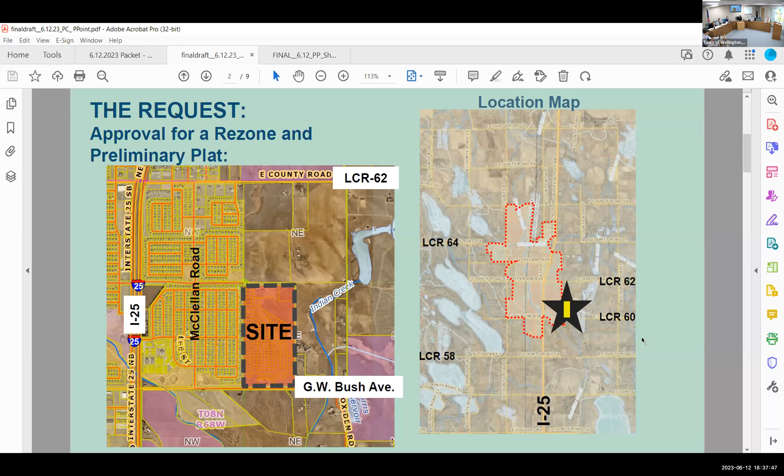So here's your location map and the site exhibit to illustrate that location. Again, if there was an error in the exact distance, it could have been copy and paste, but this is the site. It's an undeveloped platted subdivision just east of the Meadows on County Road 60, which is GW Bush Avenue. The existing zoning of the property is R2 residential low density.

The existing zoning was assigned at the time the property was annexed into the town, and that zoning was requested before the town's land use codes had changed, when the R2 was the residential medium density designation. As part of our comprehensive plan update and land use code update process, some titles changed, and some of the lot dimensions changed across the board to recalibrate all of our residential zone categories to what they are today.

So after this particular subdivision was annexed and zoned and platted, the final plat was approved in 2018. Subsequent to that, the property hasn't developed and the town's codes have changed. The applicant is now taking a look at the bigger picture for this particular subdivision in an effort to make sure that it can be financially viable in today's marketplace with those changing circumstances, and they're requesting to rezone and replat.

As I mentioned, and there's more detail in the staff report, the rezone request is really geared at the applicant asking, can we reduce the lot sizes and make the lots narrower to fit a different housing model type than what was originally contemplated.

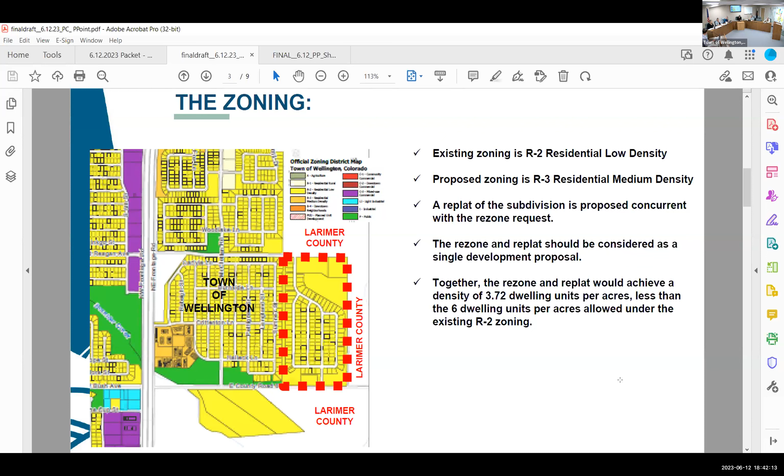But honoring the original layout and intent, from a zoning perspective, those additional lots that could be created through this development proposal are still overall under the density of the existing zoning, at 3.72 dwelling units per acre. So it's well within the R2 zoning characteristics. The R2 zoning just doesn't allow the lot size that's being requested for this particular development proposal.

And there's the text version of what I just explained. So I should have jumped this slide. Perhaps...

The important component of the changes for the lot size, as I mentioned, the irrigation water scenario, the overall changes to the site that are proposed would allow the lots to be a little bit narrower to fit what the developer thinks would meet market conditions. It also proposes reducing the depth of those lots. Some of the lots on average are currently platted to about 140 feet in depth, and that's a pretty deep lot for that narrower proposed lot configuration.

At the end of the day, what the proposal contemplates is shortening the depth of those lots, and that space would be converted to HOA common area and open space, proposed for native vegetation that would have a much lower irrigation requirement, probably just for establishment of the vegetation. After established, it would require very little supplemental water for irrigation purposes.

As town staff was evaluating the proposal, we look at a number of things, including your planning commission's findings for approval. One of those findings is the comprehensive plan. We highlight in the slides here, and the staff report goes into a little bit more depth on each of the findings.

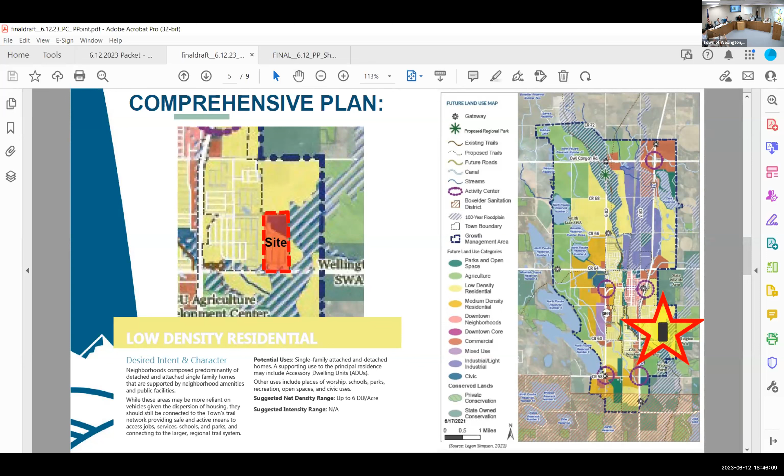And there's other factors identified in there as well, including the town's water efficiency plan, our infrastructure master plans, and our street classification and master plan. All of those documents do support, and the town can support, the infrastructure necessary for the proposed rezone and replat as presented.

So the next couple of slides, I don't want to necessarily read through these verbatim. They're on the slides, hopefully everyone can see them. There's a second monitor over here on the wall for those in the audience. But the intent here is to highlight the factors that the Planning Commission considers on a rezone, and these are further detailed in the staff report.

I can certainly come back to this if it's helpful, but I also wanted to point out the next slide, which I just switched to. It's hard to see a big difference because it's text heavy, but the second slide here is the findings for approval for a preliminary plat. So I can go back to these as necessary for presentation or review purposes.

Overall, I'll conclude with staff's assessment here, just high level, and then I'm certainly happy to go back to the staff report for more details. But overall, staff does support the request to rezone and replat this particular subdivision. That analysis is based on some of the things I just described, but primarily that this is a different way of looking at the same development proposal that the town approved in 2018.

The town has more detailed comprehensive plan land use regulations, and more information regarding our water infrastructure, our water and wastewater treatment plants, and rethinking what was originally proposed with smaller lots is more supportive of the town's infrastructure goals, primarily the irrigation component of that. The overall request is to change the number of lots from 153 that are platted today to 211, and that change reduces the average lot size, which impacts the irrigation component.

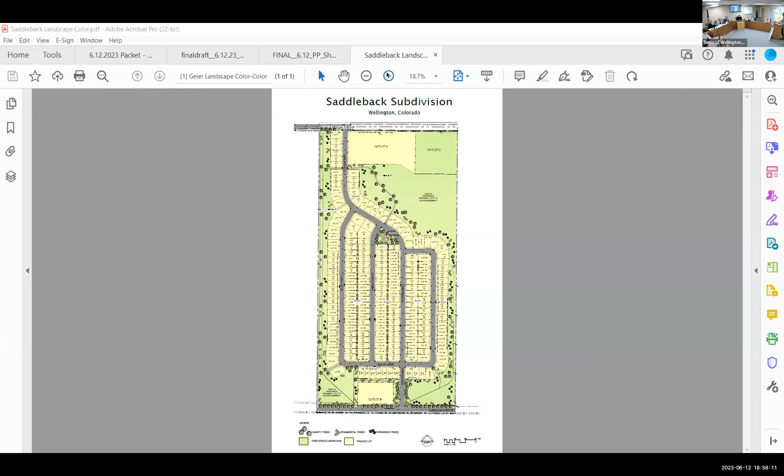Some of the lots on the existing plan are about 19 to 20,000 square feet, with an average of about 11,000. The average on the new plan is about 6,500 square feet, so just under the existing R2 zoning. With that, if anyone's got any questions for me, or we can open it up to the public.

Anything for Tom? One quick question—so when you were addressing this issue, and I do appreciate the mindfulness to water, cost, all of that—did you look at what a replat would look like at 6,600 or maybe a little more than that? I mean, 6,600 isn't super big.

And I'll be honest, my perspective is that I have a house on 6,900 square feet. So that's kind of my perspective.

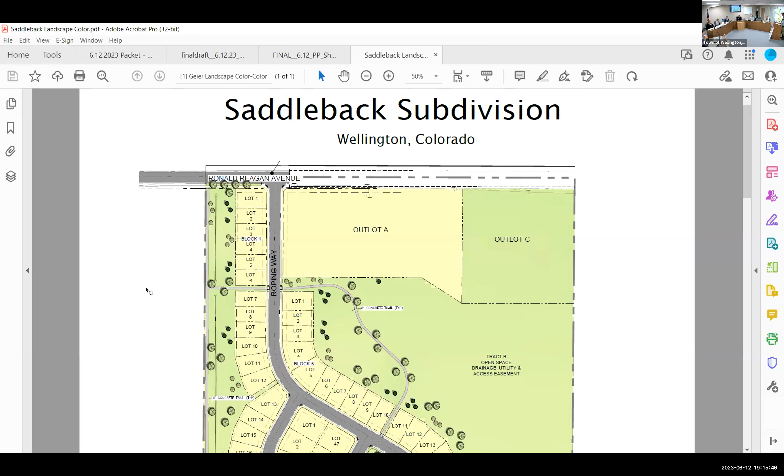I have one more question for you. Just doing a quick comparison in the center section where the park was moved into the subdivision, which I like, by the way, previously there were 31 lots. There are now 40. That's a 30% increase in the number of lots just in that center section. When I look to the west, these outer lots, originally there were 25. There's now 39, which is an increase of 56% in the number of lots.

So my question is, my comment is I like the variety of lot sizes, okay? But to go from 153 to 211 and to cite a water concern, I don't really get it. That doesn't compute for me. So I guess I'm wondering, was there any consideration for more open space? For example, another park on the south end of this property? Because right now the park for the subdivision is on the north end, but if I live on lot 44, I get a little trek to get to the park. So was there any consideration for doing something like that?

So in reality, no, we didn't consider that. The main goal here was, well, there were two main goals. One was to make the homes more attainable and affordable for the people buying them. The other was to reduce the amount of treated water being used for irrigation. So the perimeter lots were actually the largest lots on the original plan, and that's why you see the larger percentage of reduction. The other thing I want to bring up is the town code requires one pocket park per 200 homes, so we put in one pocket park for the neighborhood. It's not a neighborhood park, it's considered a pocket park. And then we have a considerable amount of open space in the project.

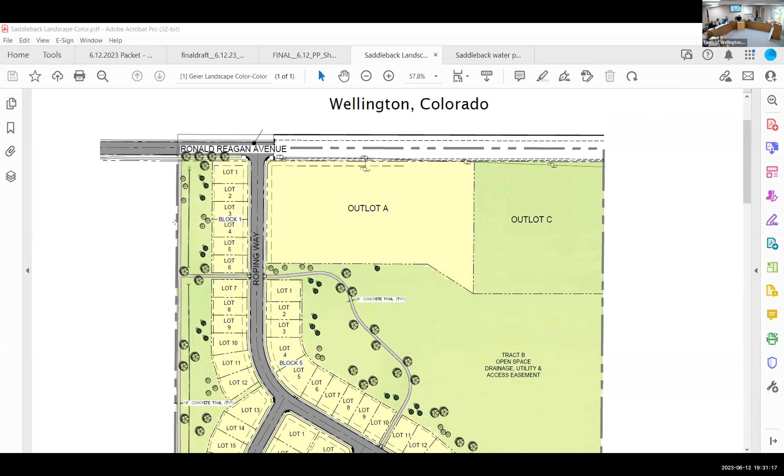So to speak to the drainage, town staff is aware of an existing condition here at the north end of the property where Park Meadows and the Meadows come together at Ronald Reagan. Part of the original development agreement and the existing development agreement for this property contemplates that existing condition. The developer is required to not only handle any additional runoff from the site development, but they're also required by that agreement to improve this existing condition to accommodate this flow better.

Staff had identified a concern that Ronald Reagan Avenue needed to be designed in such a way that it would allow passage of those stormwater flows past the roadway and not create a dam. We don't want to impact drainage north of Ronald Reagan. We've also identified some concerns with the way drainage was flowing along the Meadows.

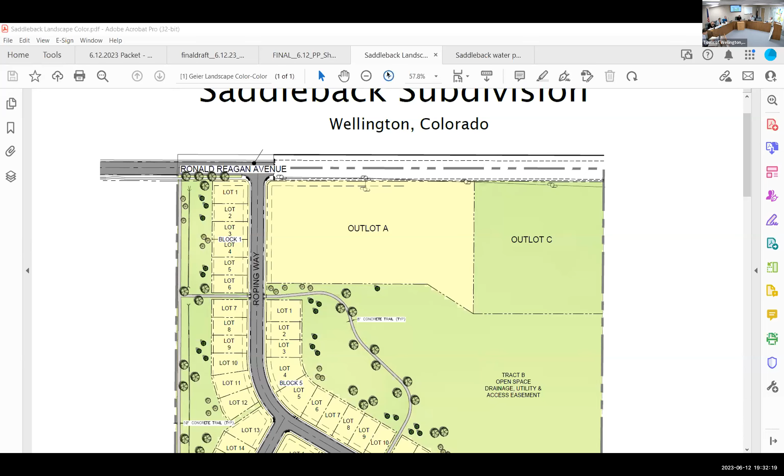So what you're seeing here, this is open space. Maybe if I even zoom in a little bit further. This area includes a sidewalk and trail connection for recreational and open space purposes. That's this gray shading you see. This whole tract that constitutes the open space is really a big swale.

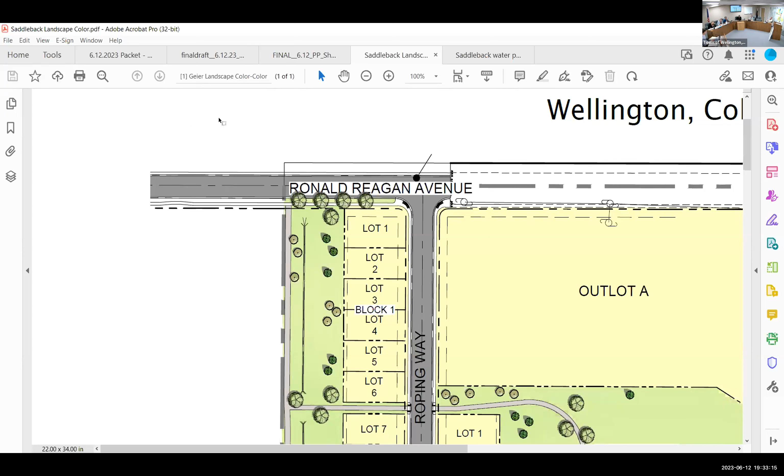It's a U-shaped channel to accommodate both the on-site drainage, so that when this property gets developed someday, the drainage for the site is required to handle all of the stormwater created from this site. It's also required to handle all the off-site flows that pass through the site. So the historic flows have to be handled here. This isn't existing today, but it's designed to be a pretty significant U-shaped channel to handle the expected stormwater flows as well as the historic conditions and off-site flows coming through this property.

That water is conveyed along the west side of this subdivision, east of the Meadows, and the south end of the property includes two ponds to detain those flows on site before releasing at historic discharge rates.

There were some other questions on traffic. There was a question about whether rezoning to R3 will have other broader impacts on density in the future. I had alluded to this earlier in the presentation. Staff is really looking at the rezoning request and the replat request as one development proposal.

When we say those two should be integrally tied, the town has to approve any changes to a plat. A plat's a legal document. It outlines the lots that homeowners purchase. It defines the open space, the tracts, the road right-of-way dedications, easement dedications. All of those are part of a legal document, and it's relied upon by the town, current staff, future staff, homeowners, developers, builders. So any change to that proposed plat, the lot layout has to come back through the town for approval.

So our staff's intent here is to document that these two are being considered concurrently, that one doesn't operate independently of the other. As I mentioned before, if this development proposal was for multifamily, townhomes, condos—those more intense land uses—staff wouldn't support that level of density. It's just not really appropriate this far away from town center. Those densities aren't really supported by a street network and utility infrastructure network that's commensurate with the surrounding environs.

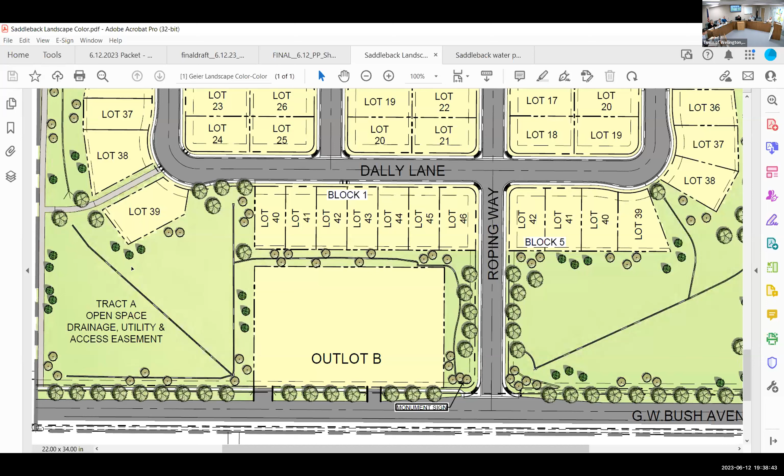One thing I might note from a town staff perspective: the development proposal as it exists in this presentation tonight has an increased density and lot count. The lot sizes are proposed to decrease from what was originally proposed, but all of those lots still have the same minimum setback requirements for fire protection services as any other subdivision in town.

They still require 7-foot side yard setbacks. 7 feet on both sides of a property line would result in a minimum of 14 feet between structures, which exceeds the minimum requirements for fire separation. So we do recognize there were some unfortunate incidents east of the highway and some response times were delayed, but from a building code and setback standpoint, the proposed development satisfies the town's minimum requirements for separation.

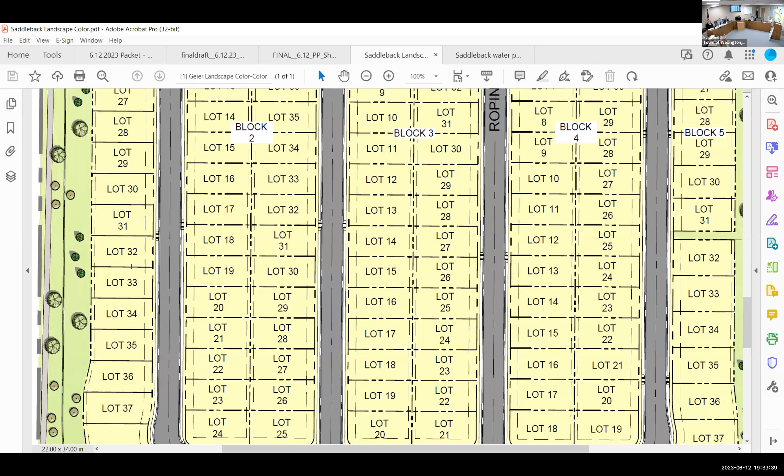There was an additional comment about access to parks. We didn't really touch on it, and I appreciate the comment bringing this up. What was commented upon was changing the configuration for the proposed pocket park to make it a little more accessible and visible for public access and neighborhood access.

The other piece we didn't really mention was that this trail system proposed along the west side of this subdivision includes an 8 or 10 foot - I'll have to go back to the design plans - but a significant off-street trail system between Ronald Reagan all the way to GW Bush Avenue, with tie-ins connecting these proposed lots to that trail system.

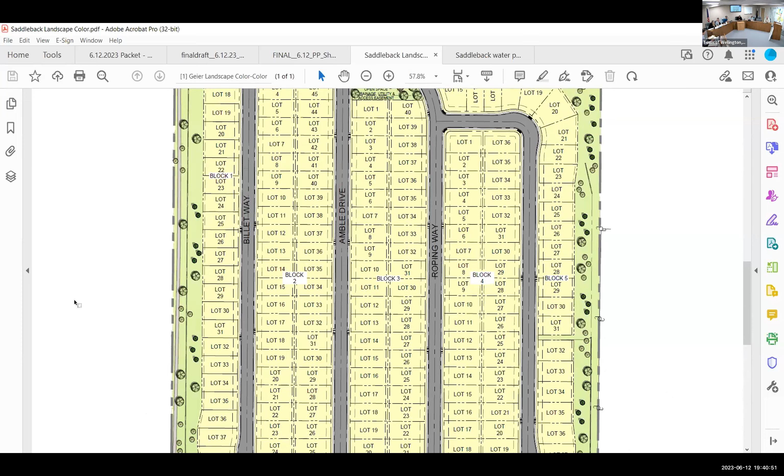The trail also connects to the required sidewalk improvements along Ronald Reagan and GW Bush, tying into the existing public sidewalk system that would connect this subdivision to Wellville Park, where the ponds are, and also Meadows Park on Ronald Reagan. So those are required sidewalk connections to tie this development to those existing public parks.

I think those are all the things that I heard that I wanted to respond to, and of course I'm happy to respond to any questions as well. I'd also point out that the applicant might want to respond to some of those comments.

The nature of the pocket park - somebody had asked the question, Christy, I believe it was your last question - about the nature of the playground equipment and its suitability for kids within that park. Maybe that's a Tom question. Yeah, I think that would be fine if the applicant wanted to respond to that as well.

I will note just procedurally to that remark, and thanks Tom for bringing that up: the development process includes preliminary plat for subdivision developments going through the planning commission. The planning commission makes a recommendation to the board of trustees on the preliminary plat.

We're also scheduling for the town's, it's now PROST, Parks, Recreation, Open Space and Trails Board. The PROST will have an opportunity to weigh in on the proposed park, open space, and trail connections as well. We're soliciting that recommendation from the PROST to also help guide the final plat process and the board's final decision making. So there's several meetings that have to take place for a preliminary plat proposal.

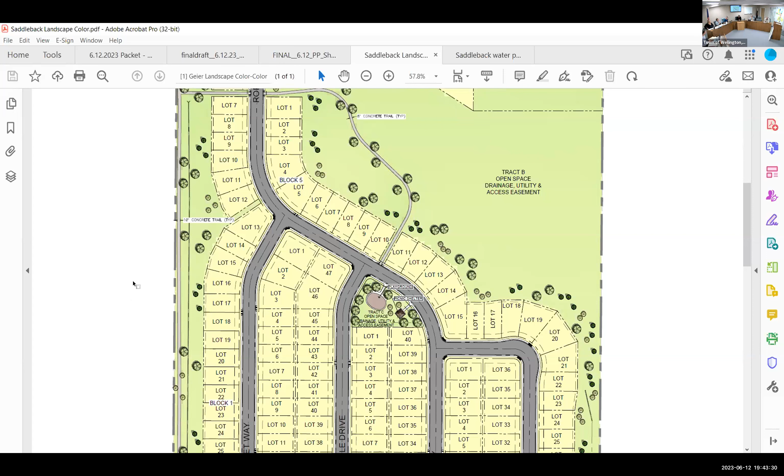We talk about a 4 to 6 year build out period, and 1 or 2 phases. Can you clarify, after infrastructure, if that's going to take about a year, an approximate number of homes you anticipate building per year, or what those 2 phases or 1 phase may look like?

Yeah, so this is already approved. We already have it at 4 phases. Depending on what the market's gonna do, we'll phase it. Or we'll probably do it either in half, 2 phases, or really, we worked with Cody to delay this project because it was already approved 4 years ago.

And with the water situation, we delayed it. Now looking at the water situation, it just does not make sense to have 19,000 square foot lots that people can irrigate without a non-potable system.

And in our covenants, we feel like, and we're working with Cody, we can control the front yards and side yards. In the development agreement and covenants, we'll put in there that the builder must install front yard and side yard landscaping, so that we can really control the water, and the amount of water and turf that they're gonna have. We know we can't control the backyards, but we can control the open space and front yards and side yards. So we'll put that in the covenants and the development agreement.

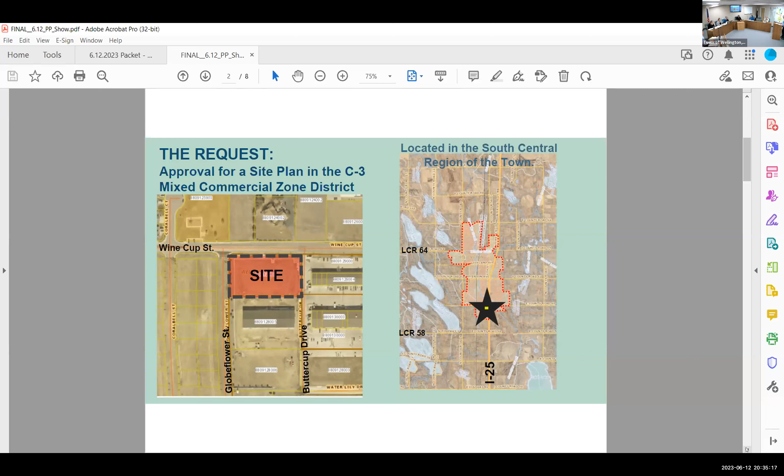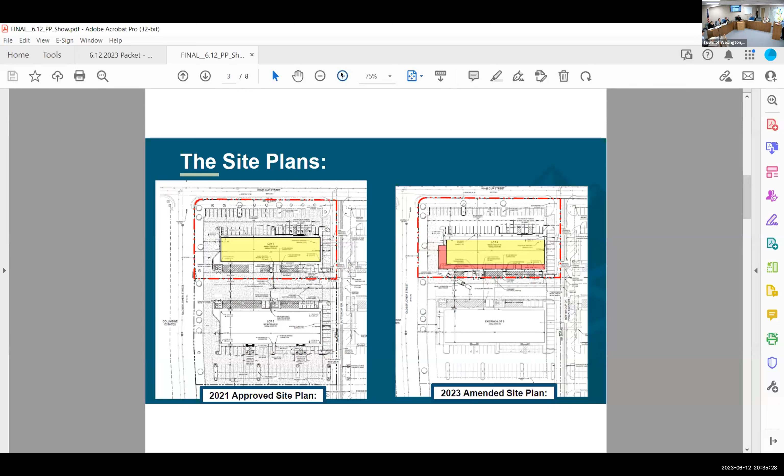The site plan itself, the applicant is proposing to take the building identified in yellow, which was approved in 2021 with construction starting in 2021, and basically add 20 feet to the building footprint, indicated in red, in the proposed, or amended, site plan of 2023.

Pretty much everything else remains the same. The lot does not change. The other parking counts, landscape, everything pretty much remains the same, other than the expanded footprint — basically shifting to add an additional 20 feet to the south edge of the existing building footprint. Also, they're going to add a covered loading dock on the very far west side of the property.

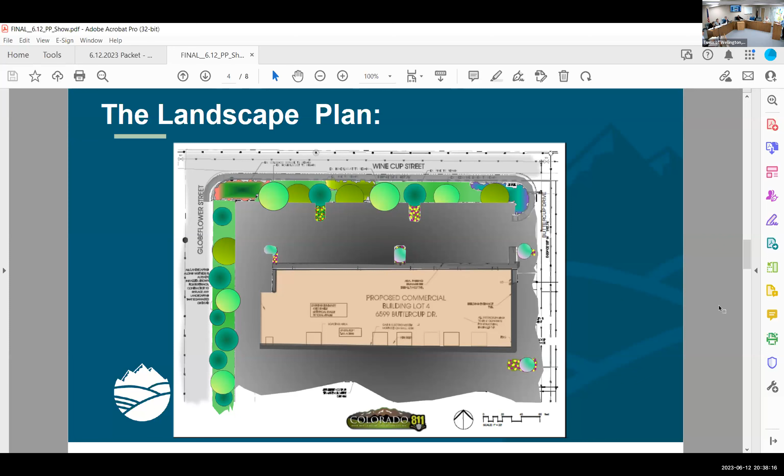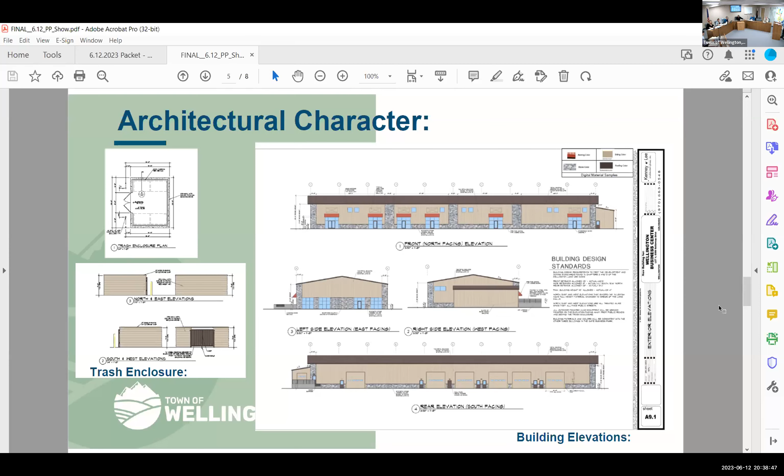Other than that, not much else is occurring on the site. The architecture remains the same, consistent with the building on lot 5, and consistent with what was approved on lot 4 and 5 in 2021. So that hasn't changed any — the architectural characteristics stay. Also, the photometric plan remains the same as originally approved.

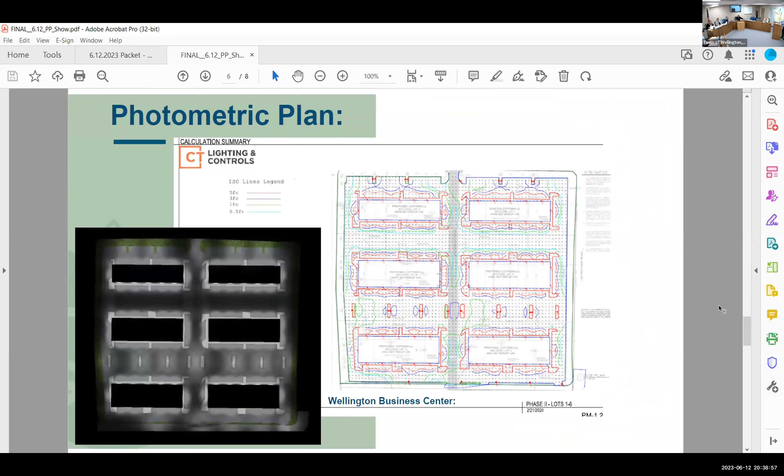So with that, myself and the applicant, who's online, can entertain questions from the commission. Thank you.